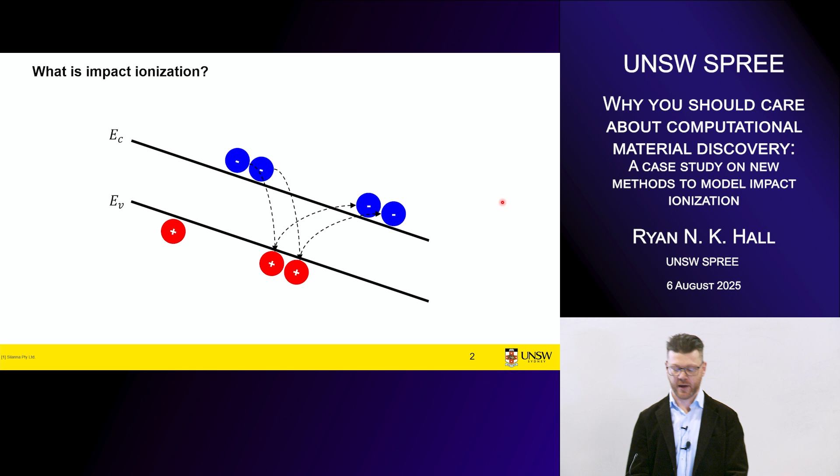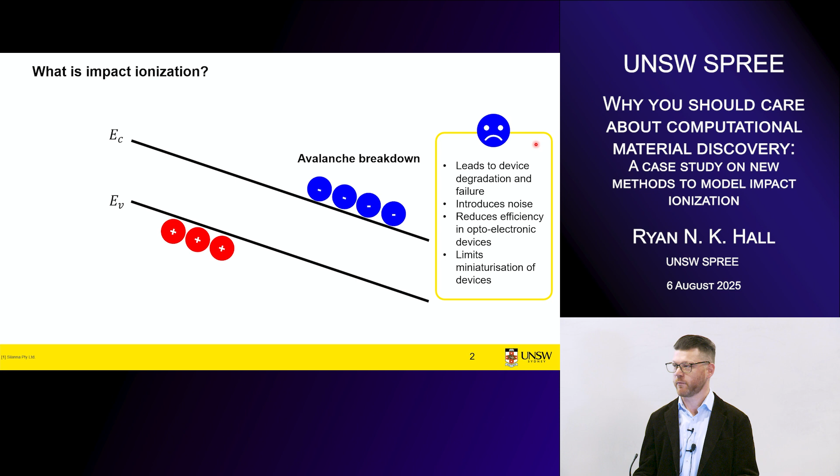If this electric field persists, these subsequently generated carriers can be further accelerated by the electric field, generating more electron hole pairs. When this process runs away in this manner, it's known as avalanche breakdown. We normally think of avalanche breakdown as detrimental to a lot of devices - it leads to degradation and failure, limits the maximum voltage or electric field we can operate power electronic devices at, reduces the efficiency in optoelectronics, and limits our ability to miniaturize modern CMOS devices.

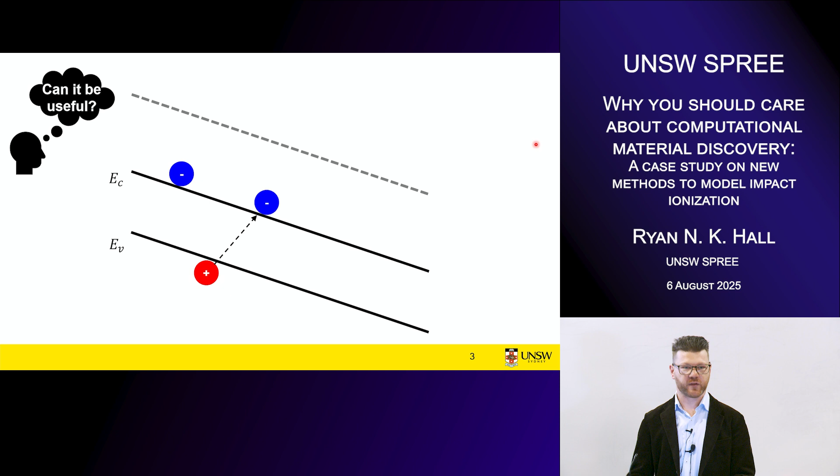But impact ionization can also be quite useful. Here we have the same fictitious band structure again, only this time, let's say a photon with just the right energy comes in and ionizes our conduction band electron to a higher energy state. Now it can impact ionize this bound carrier across the band gap, generating that same electron hole pair, and in the presence of an electric field, this process can lead to an avalanche breakdown that generates a large current in response to, say, a single photon.

This exact mechanism is exploited in devices like avalanche photodiodes, or APDs. It can also be used for microwave or RF generation in devices like IMPATT diodes, and it's commonly seen as a mechanism in high voltage protection devices like Zener diodes and electrostatic discharge protection diodes. But the motivation for my PhD didn't come from these existing applications.

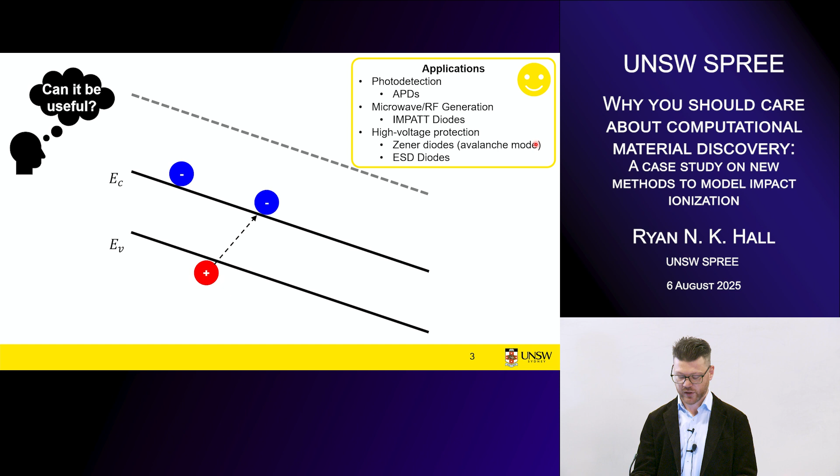Now, all of these devices use very similar architecture. Functionally, they're a PIN diode or a PN heterojunction with an N-type contact for injecting electrons and a P-type contact for injecting holes. In the middle, our recombination layer is typically constructed of a heterojunction forming a multiple quantum well in the case of LEDs.

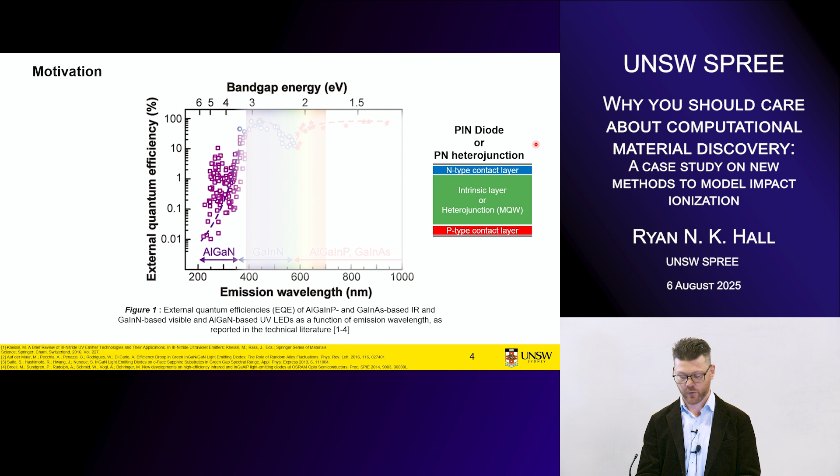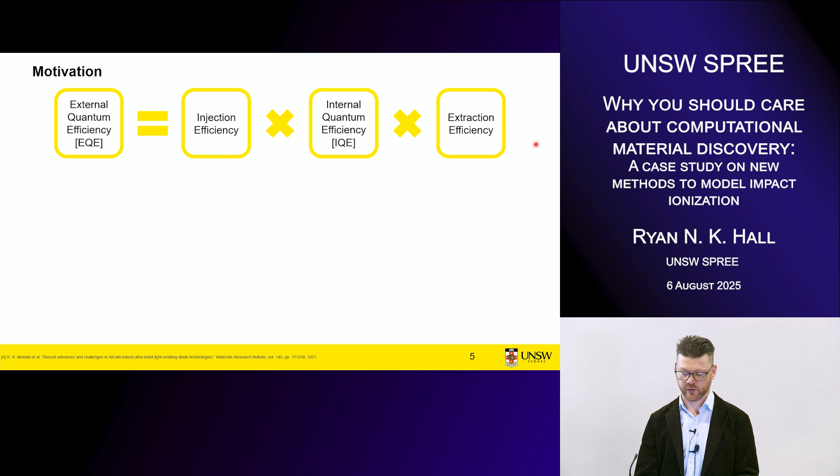So why do these UV devices perform so poorly? Well, the external quantum efficiency can be thought of as a product of our injection efficiency, our internal quantum efficiency, and our extraction efficiency. Now, the reason UV LEDs perform so badly is because we're extremely constrained in the available material systems that we can use. This comes down to that preconceived notion of the device architecture we use, namely this p-n heterojunction, and the material system that's conventionally adopted is aluminium gallium nitride, or AlGaN.

And it has quite high threading dislocation density, which limits its IQE. It also has split modes of polarization, which limit the maximum extraction efficiency. And so this is the reason we see this large drop-off as we move towards 200 nanometers.

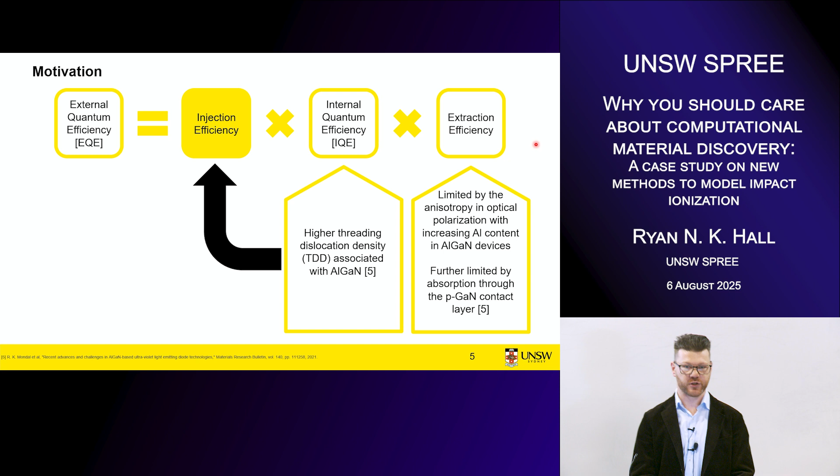But Solana had this idea of, well, why do we use a p-n heterojunction as our LED structure? What if we looked at the way we inject carriers? Could we unlock new material systems and avoid issues with the IQE and the extraction efficiency by looking at different carrier injection mechanisms? Their idea was to use impact ionization. The challenge here was, can we achieve efficient carrier injection in wide and ultra-wide bandgap semiconductors? Their proposed solution was to generate these charge carriers using an impact ionization generation scheme.

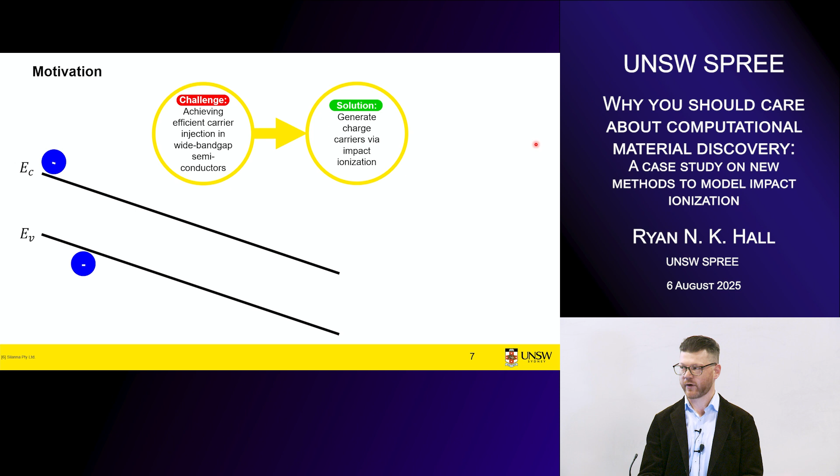Going back to our fictitious band structure again, the way this is applied, we have a conduction band electron accelerated by an applied electric field. It generates an electron hole pair via impact ionization. Perhaps some number of collisions occur in an avalanche scheme. But if we can find some way to relax this applied electric field, we can allow for radiative recombination and hence light emission. The way Solana achieved this is through a spatial device.

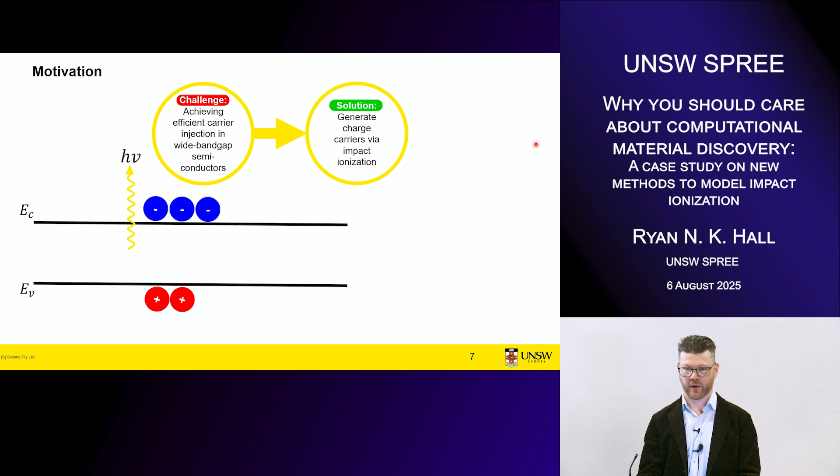We have a sort of simplified structure shown here with two N-type contacts. And this is important - we've mitigated the need for a P-type contact in this material. In this case, the top three layers, the impact ionization layer and this charge/chirp layer, form or functionally act like a P-type contact. The way this works is we inject an electron into the bottom N-type contact here.

It travels through our recombination layer into the charge layer where it's accelerated to sufficient energies to generate an impact ionization event in the impact ionization layer. The subsequent electrons flow out of the device, but the generated hole flows in the opposite direction where it can recombine with another electron inside this recombination layer, leading to light emission without the need for a P-type contact.

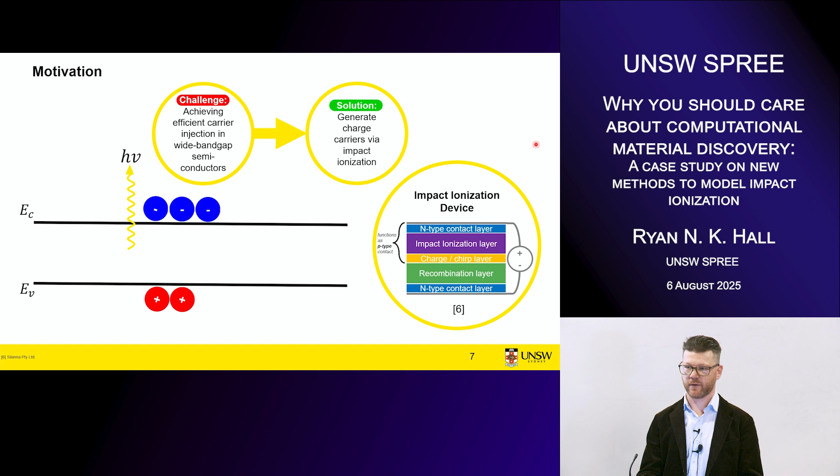And this is important, as I said, because the need for a P-type contact in wide and ultra-wide bandgap semiconductors has severely limited our material selection. So the question Solana posed to me is, can we generate new materials, or can we investigate new materials and their feasibility to achieve efficient carrier injection using this impact ionization scheme? And so the goal of my research is, in general, can we identify materials with favorable impact ionization properties for devices? My approach was to develop a high-throughput framework for computing the impact ionization properties of materials.

High throughput is a keyword here, and it's important because it prohibits experimental characterization as a valid approach. It also prohibits computational methods that are intractable to large-scale analyses.

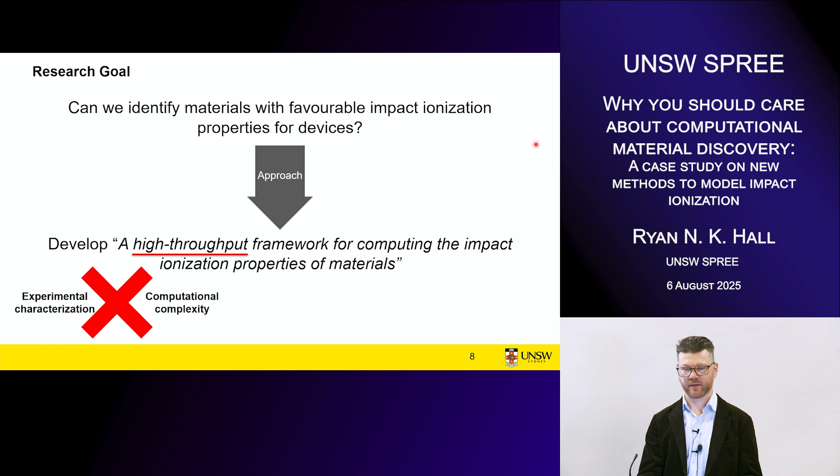And so I started with this problem and started to look at how we model impact ionization and what the limitations are on it. Impact ionization can be modeled in a multi-scale modeling scheme all the way from the microscopic scale right up to the macroscopic scale. At the microscopic end, we have electronic structure calculations like density functional theory, from which we can derive important microscopic properties like the impact ionization scattering rate. This scattering rate tells us the number of carriers generated per unit time as a function of the initiating carrier's quantum state, and it has an associated impact ionization threshold.

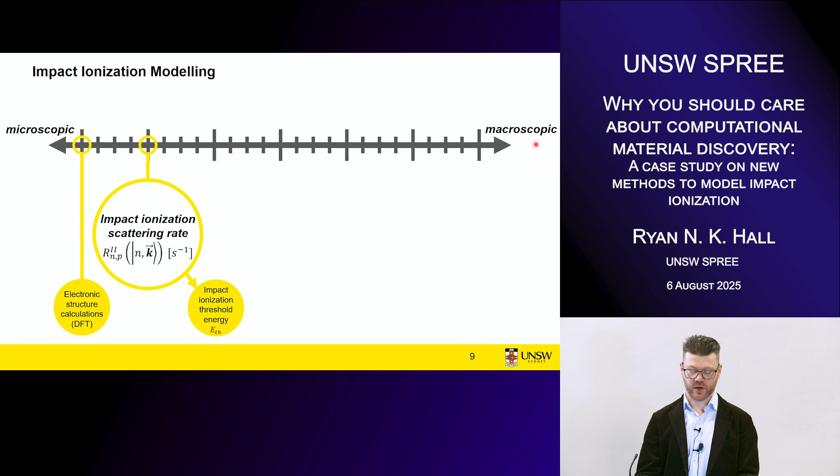On the macroscopic end, we have properties we care a lot more about for engineering semiconductor devices, namely the impact ionization coefficients. These describe the number of carriers generated per unit distance traveled by a carrier as a function of an applied electric field. And from this, we can access experimentally observable parameters like the multiplication factor, or in the case of power electronic devices, the avalanche voltage breakdown fields, etc.

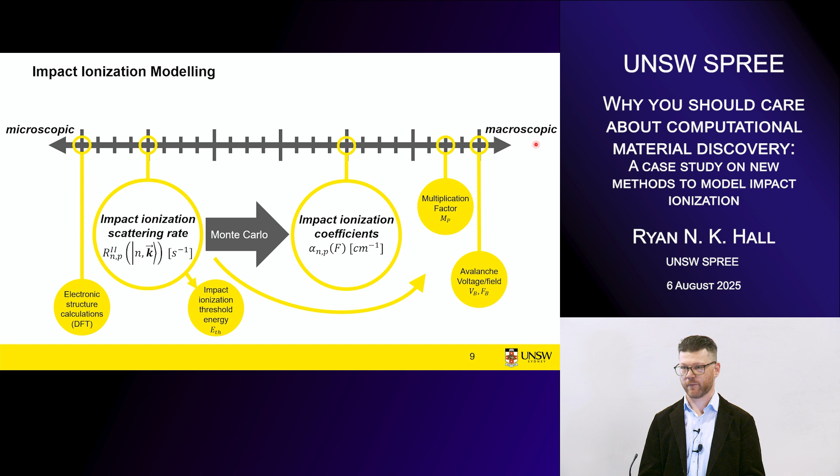So how do we bridge this gap from the microscopic to the macroscopic? Conventional computational methods leverage stochastic methods like Monte Carlo techniques to infer information about the impact ionization coefficients from these more fundamental properties, but these are computationally intractable. My research goal was, can we learn something about these experimentally accessible properties just from these microscopic properties alone and build an efficient computational scheme for identifying new material candidates?

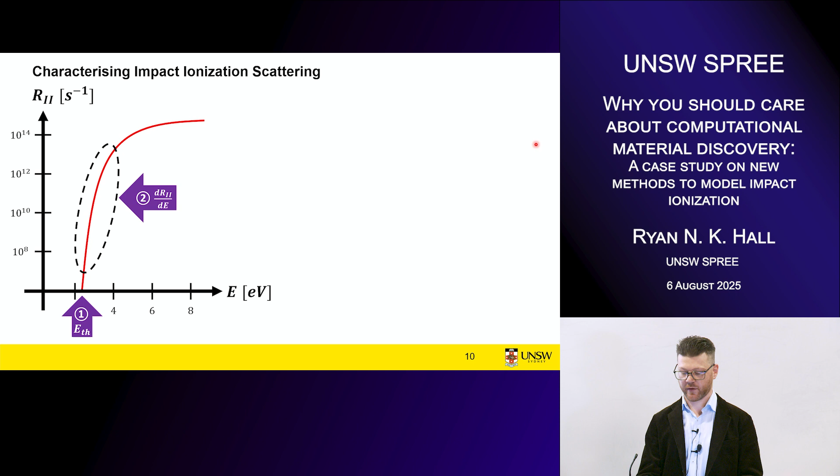The most rigorous way to model this comes from first-order perturbation theory, where we use Fermi's golden rule to describe the transition rate from a set of initial states to a set of final states. This formula looks intimidating, but effectively it says that the transition from an initial state in K1, impact ionizing a state in state 2, to these two post-collision states can be described as a product of a matrix element, which describes their interaction probability, multiplied by their density of final states, captured by this Dirac delta expression.

This process is subject to two conservation criteria. Here we can clearly see the energy conservation criteria described, and if we write K2 in terms of K1, K3, and K4, we have the momentum conservation constraint as well.

Practically, we want some energy averaged transition rate. We don't want to see what an individual scattering probability looks like for some random set of carriers. So we have to integrate this complex function over all possible combinations of post-collision states, leading to a gnarly six-dimensional integral with a composition of a Dirac delta. We're getting into computationally intractable territory, and this is without even exploring the matrix elements, which are themselves a very challenging problem to solve.

And the integral doesn't stop there. If we want the energy averaged rate, now we have to integrate over all of the constant energy isosurfaces and figure out, for a given energy, what's the average rate of impact ionization.

I didn't want to do this, not only because it was hard—although that was very convenient—but it's computationally prohibitive for these high throughput applications. So, luckily for me, the more useful output of these studies is this Keldysh model formalism for the impact ionization scattering rate. Effectively, it says that this energy averaged scattering rate can be described by a simple function where we have an exponent term alpha, a threshold energy ETH, and some average matrix element described by P.

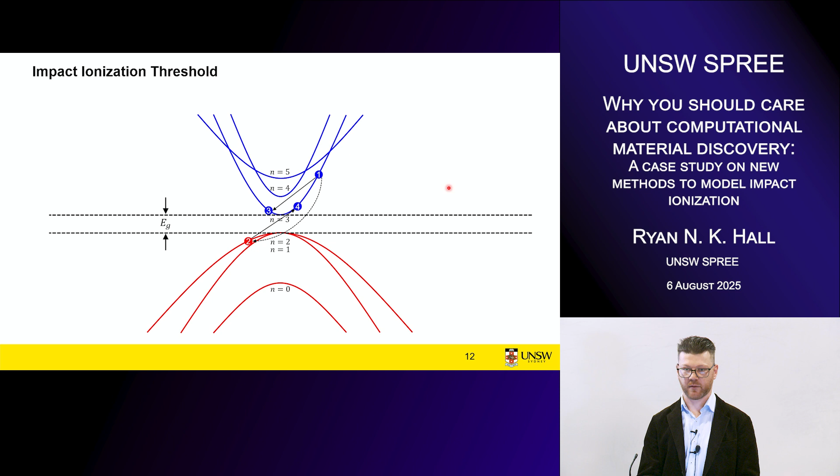As I mentioned before in Fermi's golden rule, there are two conservation criteria this scattering mechanism must satisfy: total energy must be conserved, and total momentum must be conserved. Taking these two conservation criteria, we can solve for the minimum energy this initiating carrier can have, if we know information about the electronic band structure, and then define the impact ionization threshold.

It turns out it's rather convenient to solve this minimization problem in two steps. First, we say let this initiating carrier come from any state—it's not bound to the band structure—and we just minimize the total energy of the post-collision states and the impacted carrier. That gives us a curve describing the minimum energy as a function of an initiating carrier's momentum. Then, from the intersection of that curve with the band structure, we can find the true impact ionization threshold. This next figure hopefully makes that clearer.

But before we get to that, conventionally, this impact ionization threshold in experimentally accessible simulation environments is approximated by this rule called the 3-to-2 band gap rule. The main output of my first chapter was to show that this is a really poor approximation. It comes from an assumption that the effective masses are equal in the conduction and valence band, and inherently that the initiating carrier comes from one of those bands.

And if we make those assumptions, it turns out that we can say the threshold is just 1.5 times the band gap of the material.

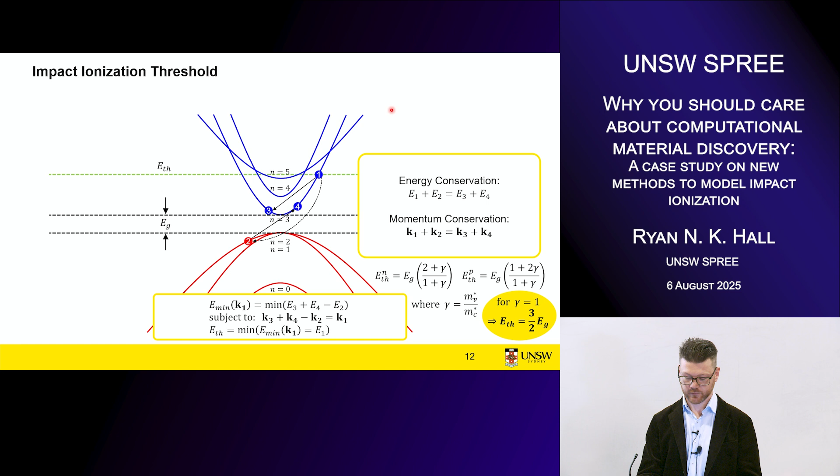So back to the figure that hopefully makes this minimization strategy a little bit clearer. Here we show the band structure for gallium nitride with a band gap of 3.4 electron volts. Superimposed on it is the blue curve showing the minimum energy an electron would need to have as a function of its momentum in order to satisfy the energy and momentum conservation constraints, and red is the same for holes. Where this curve intersects the band structure, we have an impact ionization threshold.

In fact, the threshold is the lowest energy intersection with this band structure. All of these higher order interception points are important, but we'll get back to those a little bit later on.

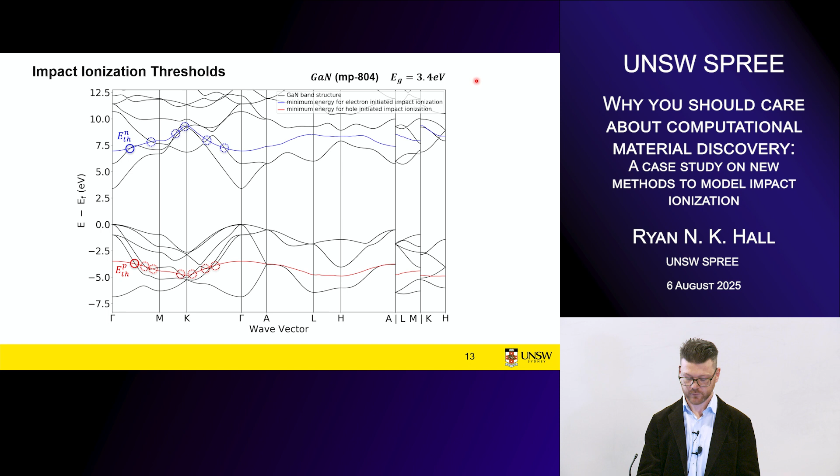So I took this minimization algorithm and I wanted to leverage this database called the Materials Project in order to perform these high throughput analyses.

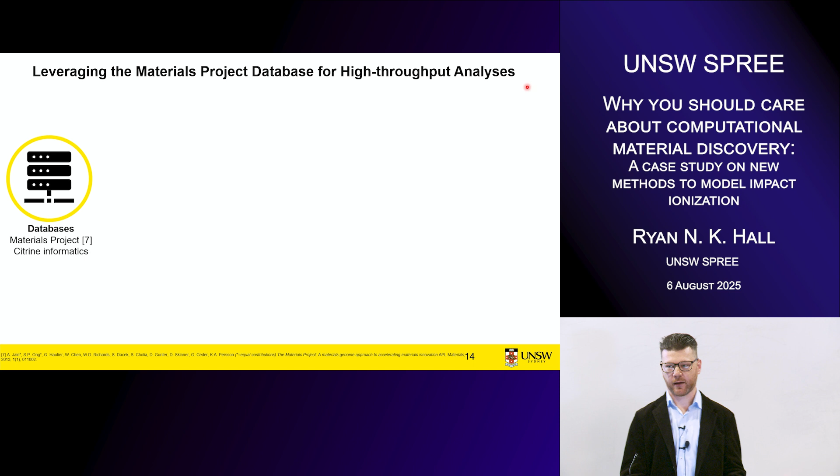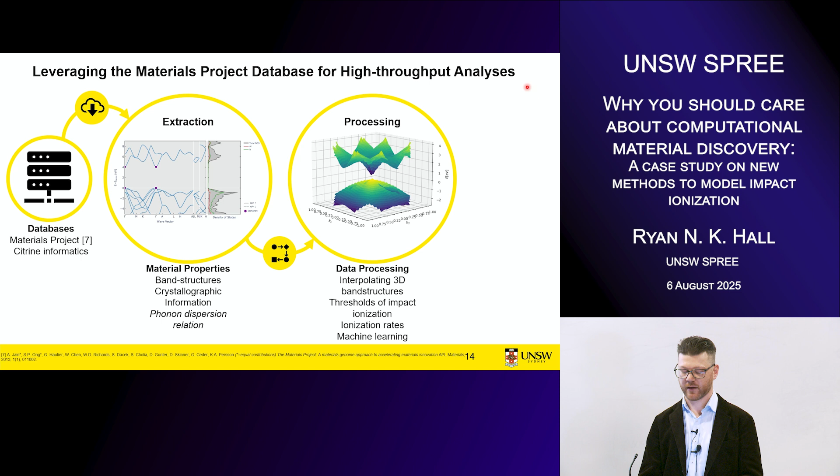The Materials Project database contains several 100,000 density functional theory calculated electronic band structures. We use that information and extract from it the band structures, crystallographic information, and things like the phonon dispersion relation. We then perform our minimization algorithm to extract the thresholds of impact ionization, including a few pre-processing steps.

And finally, we have our outputs, which we can recontribute to the academic literature or directly to the database through their API. And so what did those results look like?

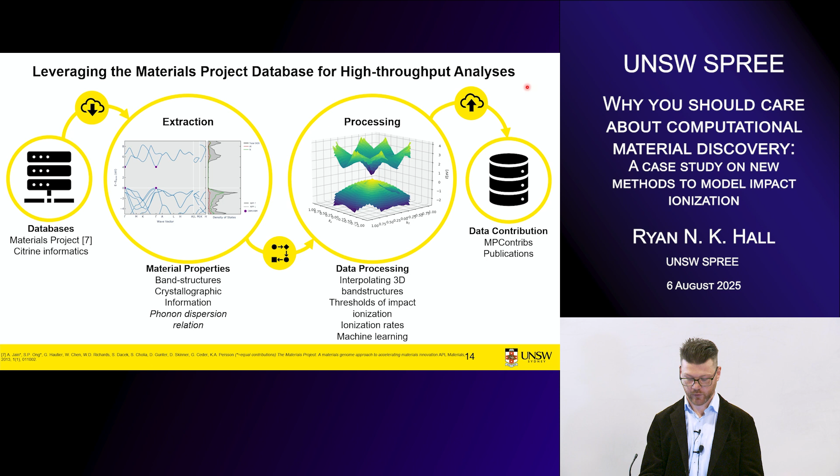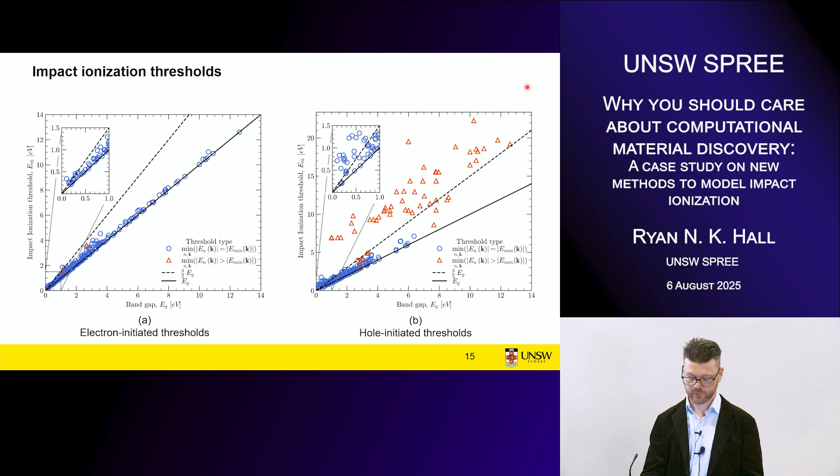So why is this the case? Well, like I said before, the 3-to-2 band gap rule assumes that impact ionization, firstly, the carriers have to come from these first conduction and first valence bands, and that those bands have to have equal effective masses.

And so for that to be true, the energy conservation criteria alone tells us that therefore the intraband energy range of that first band must be at least the band gap. The idea being here that in order for a carrier to undergo impact ionization, it has to be able to lose at least a band gap's worth of energy and remain in the conduction band.

Therefore, if it's to come from the first conduction band, that conduction band has to have an energy range that is at least a band gap's worth.

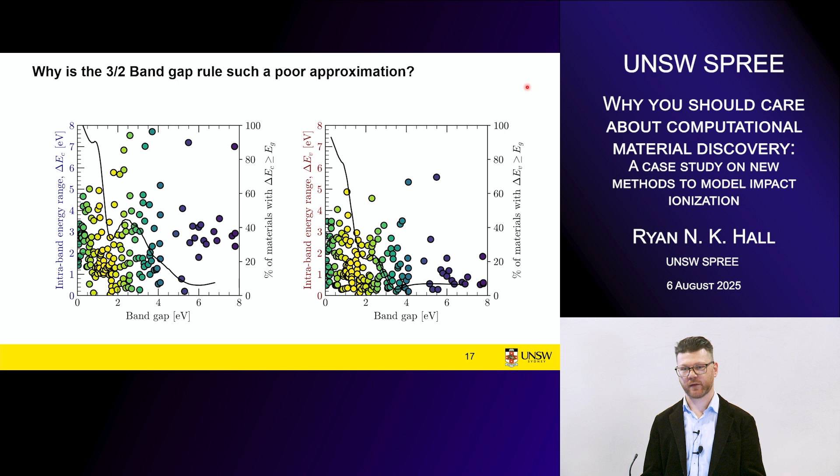And we can see once we go above sort of 1.5 to 2 electron volts, in both cases, fewer than 50% of the materials satisfy that criteria. And so this kind of gives us an indication of when the 3-to-2 band gap rule might be applicable. And beyond this point, it can't be valid at all.

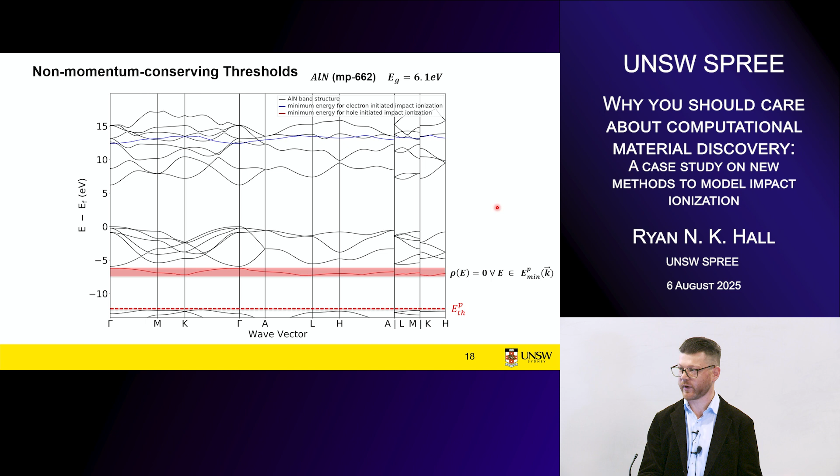So what's the impact ionization threshold in this case? We assume then that it must come from the next available energy state. And so this threshold, in the case of aluminium nitride, gets pushed up to quite a high value. This actually has really important implications for materials.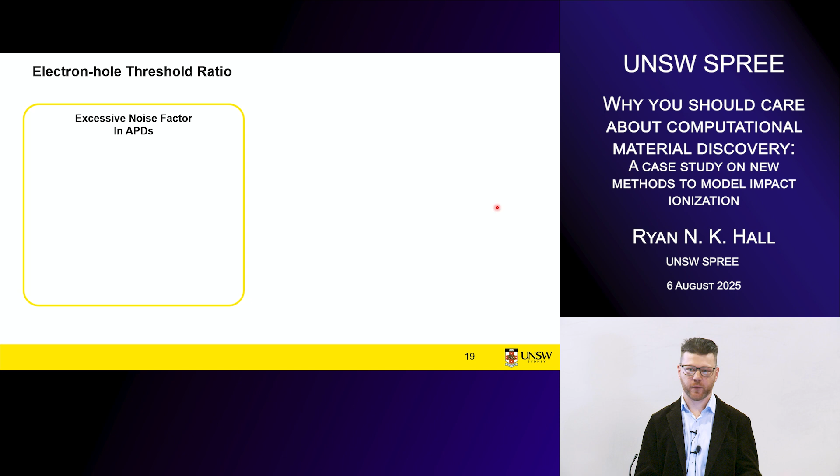We can look at something like the electron-hole threshold ratio. Why might this be important? Well, we talked about APDs at the start. One of the really important properties for APDs is that you have high asymmetry between the electron and hole initiating impact ionization coefficients. And this is because the excess noise factor depends quite heavily on this ratio K.

It turns out that the impact ionization coefficients are quite strongly related to their thresholds, and so we can say that K approximately has an inverse exponential dependence on the difference between the hole and electron-initiated threshold. So if we can find materials with a really large difference between their electron and hole-initiated thresholds, they might be really good material candidates for avalanche photodiodes.

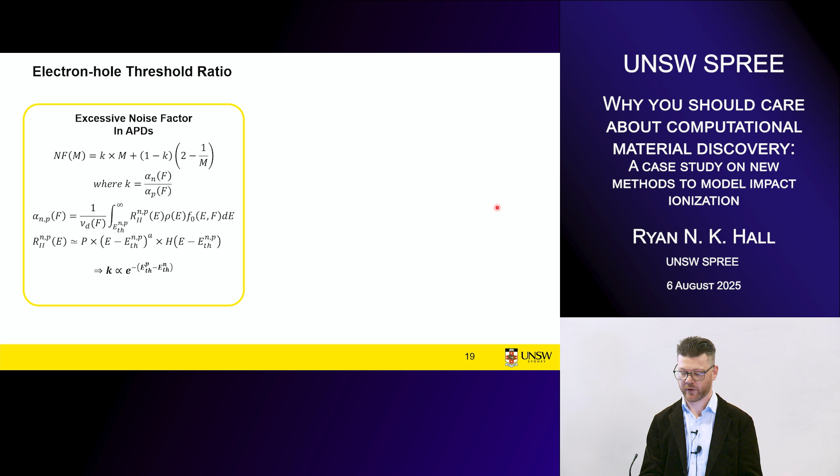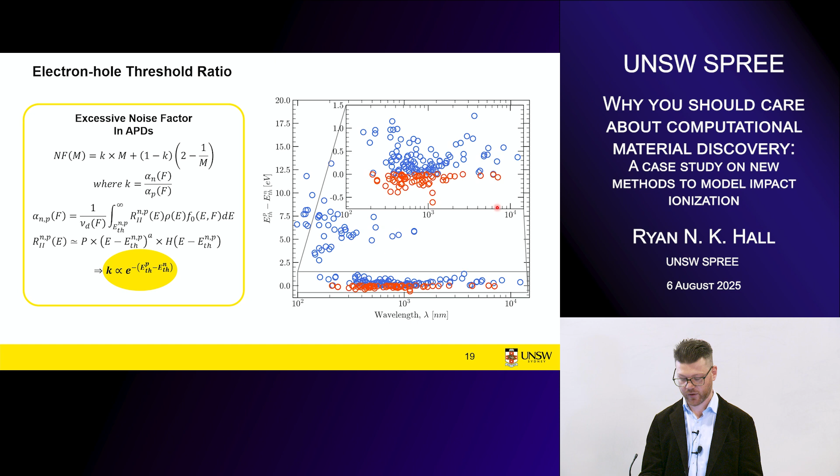We can see, particularly at these really short wavelengths, in the deep ultraviolet regime, there's quite a few materials with a lot of asymmetry. For those interested in specific materials, I've also got some tabulated data that shows some of these potential candidates for APDs. If you want a detailed look, go to the recording or read my thesis.

So in this first chapter, we solved the question of what the impact ionization threshold looks like. And we can use that to already perform some really meaningful material discovery. We can identify candidates for APDs, and we can delineate the importance of the threshold in terms of debunking the 3-to-2 band gap rule.

So in the second chapter, I wanted to explore how quickly this impact ionization scattering rate increases as a function of the electron's or hole's energy.

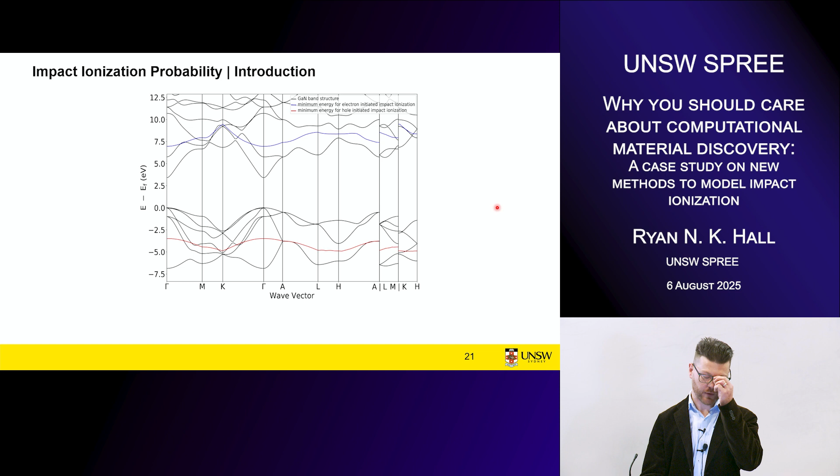To do this, we can actually leverage some of the information we generated in the first chapter. One of the things you'll notice about this minimum energy curve is it shows a lot of K-space anisotropy — it changes as a function of the applied momentum. In the 80s, another author, Sano, had this idea that this anisotropy in the minimum energy required for impact ionization is largely responsible for the onset of impact ionization about the threshold.

The idea being that this K-space anisotropy really comes from the momentum conservation constraint. At threshold, we know momentum is perfectly conserved, but we're very sensitive to changes in momentum close to the threshold, where the phase space for our scattering rate is very, very small.

And so he said, well, if we have an electron above a threshold, it definitely will impact ionize. This is an approximation. And if we have one below the threshold, then it won't. We can write that as a Heaviside step function.

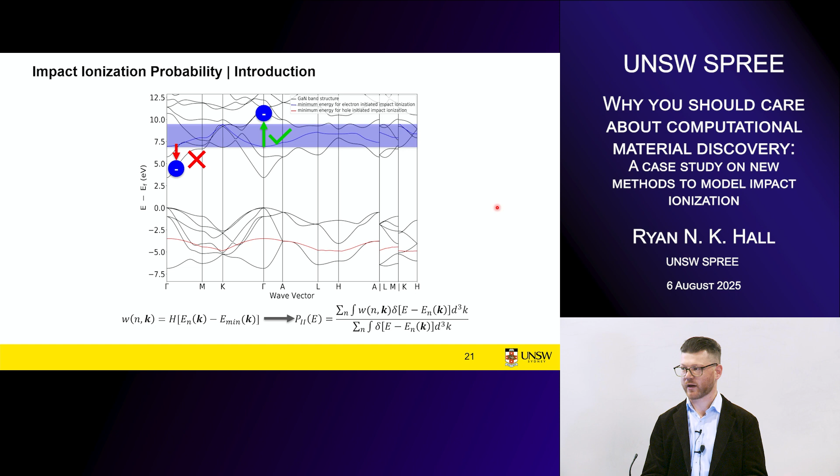We could say, well, if our energy in our band is greater than our minimum energy required for impact ionization, the probability of impact ionization is 1. Otherwise, it's 0. And with that, we can then integrate it over these closed energy isosurfaces to get the energy averaged probability of impact ionization.

In order to solve this on a high throughput scale, I had a lot of fun developing some new methods for the simulation. This integral, while it's only in 3 dimensions, still involves that rather challenging composition of a function with a Dirac delta. So I leveraged methods used in computer vision to solve this integral in a computationally tractable manner.

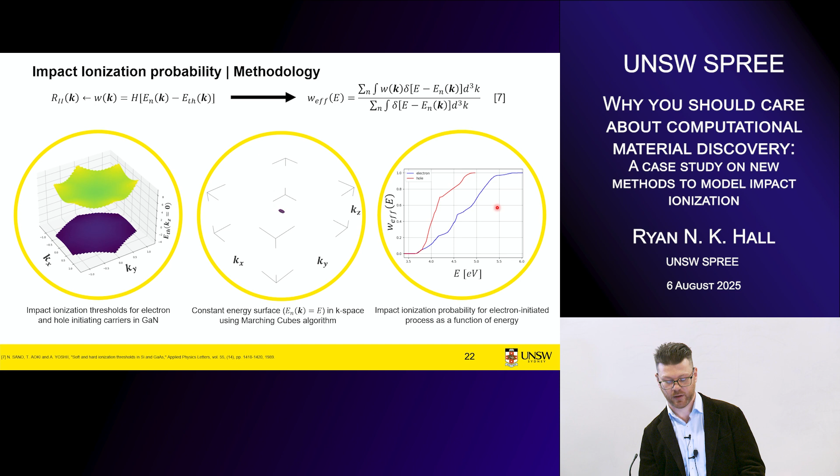Namely, I used an algorithm called the marching cubes algorithm to extract these constant energy isosurfaces and their normals and compute this integral. The workflow was to interpolate our thresholds in K-space, extract these constant energy isosurfaces, and then compute the corresponding probability integral, which we can see on the right, for gallium nitride.

Here are some results compared against the author's original work and other work replicated later on. At the time this work was done, its value wasn't fully appreciated. I think Sano's idea was that it would be a stand-in for the scattering rate itself, but that was very quickly debunked in subsequent literature.

Some other authors looked into it as an interesting metric, but there was no really useful result to derive from that. The work initially performed here was just to validate that our integration method works well, and we can see, at least for silicon and gallium arsenide, similar probability curves to those proposed by the original author and subsequent authors, with a bit of a big difference in the case of silicon, but this was addressed also by Harrison et al.

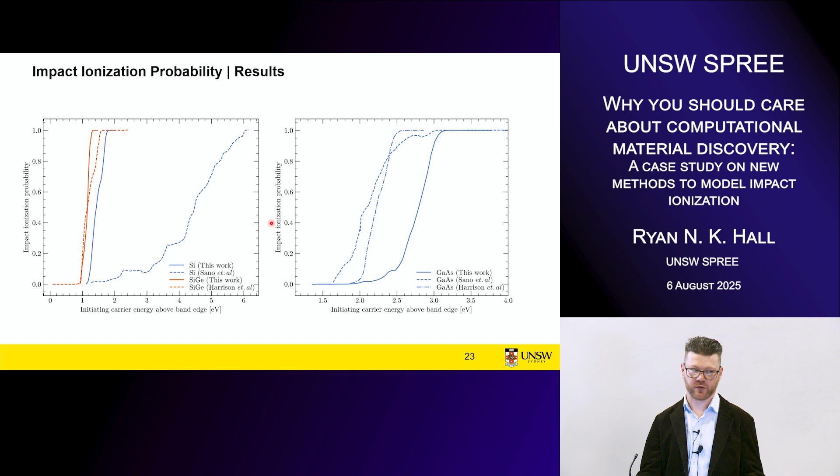In their subsequent follow-up. But the real value in the impact ionization probability isn't from this curve alone. This doesn't really tell us much. It gives us an indication of the onset of impact ionization close to the threshold. But again, we can't use it in Monte Carlo simulations to derive these important experimentally observable properties.

Looking at gallium nitride and aluminium nitride, though, we can learn something, at least from these curves alone. I think one of the most interesting results I got from these wide bandgap semiconductors is that sometimes this probability curve is not monotonic. This was a frustration for me during the PhD, as I was consistently predicting the threshold energy for aluminium nitride to be virtually equal to its bandgap. But everyone else doing these comprehensive calculations using Fermi's golden rule was finding the threshold energy to actually be up around 6.6 electron volts.

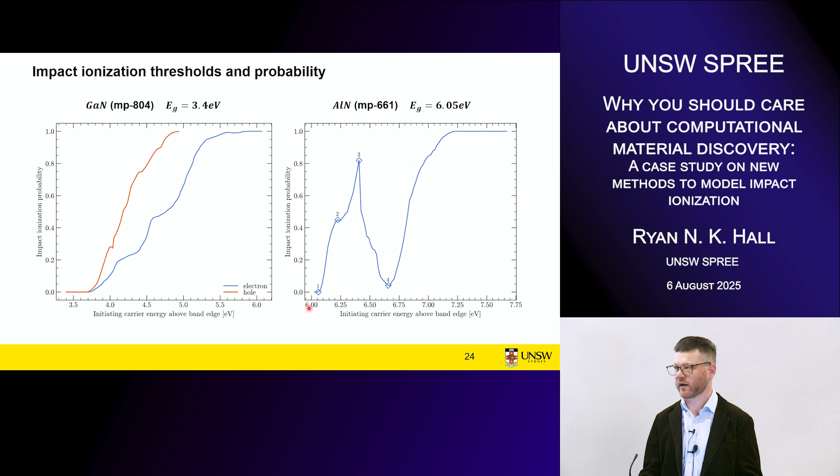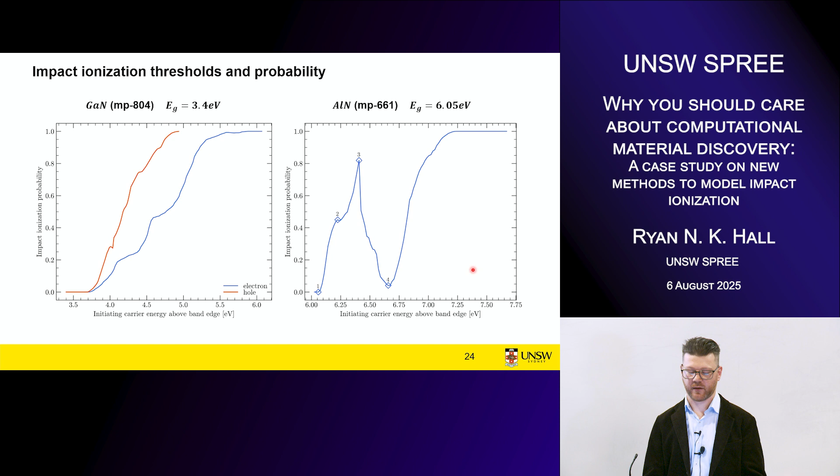This is because while we can find a threshold here, i.e. a point where energy and momentum are perfectly conserved, the corresponding phase space could still be very small. We don't know, because in this probability assumption, we say if we're above the threshold, impact ionization definitely occurs. But we're not guaranteed to satisfy those two constraints. From this curve, we can at least extract interesting inflection points where the true experimentally accessible threshold might actually lie. So I took this a little further and thought there's got to be something else we can do with these probability curves.

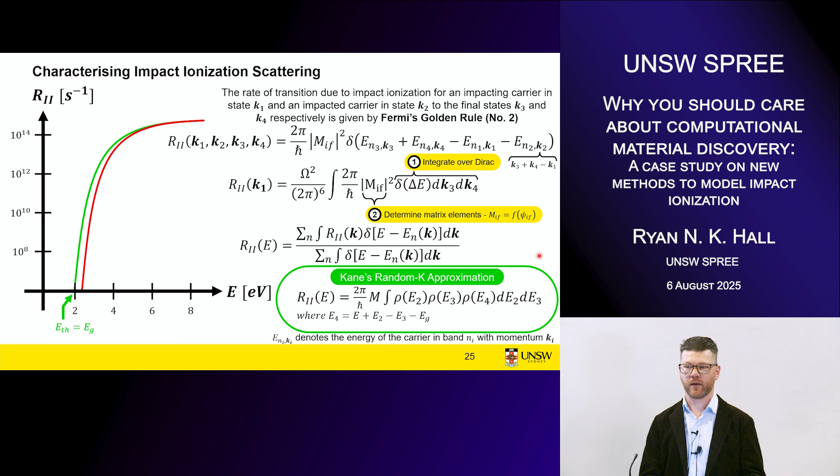Going back to Fermi's golden rule, there's an approximation introduced late in the 60s where we drop the requirement that momentum needs to be conserved. This is known as Kane's random k approximation. It turns out quite nicely that you can represent the energy averaged scattering rate as simply an integral of the single particle density of states. The problem with this approximation is that your threshold energy always ends up being the bandgap, because you're not constrained by the criteria to conserve momentum. But our probability curves do take into account the effect of this anisotropy close to threshold.

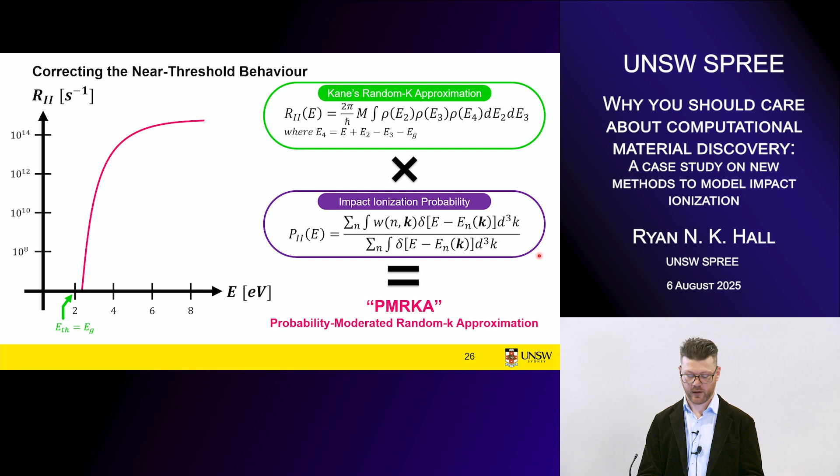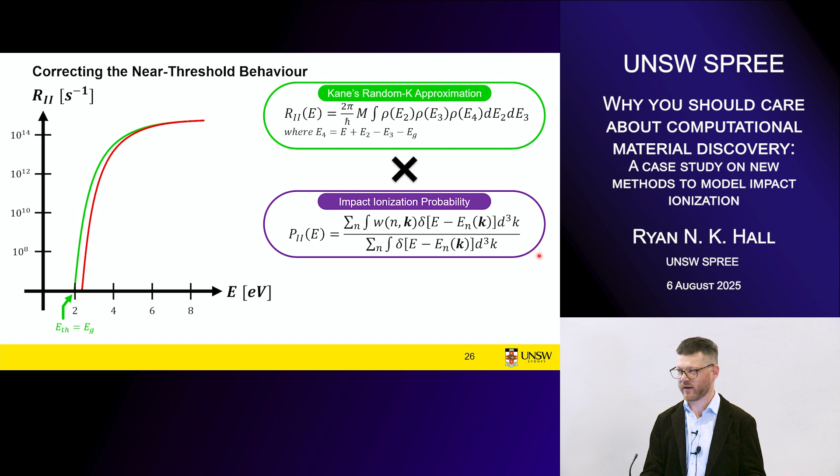So what if we took Kane's random k approximation and just multiplied it by a probability curve? I define this term the probability moderated random k approximation, and it corrects the near-threshold behavior of Kane's random k approximation. This is quite good because looking at Kane's rate, we know at high energies it converges to the true scattering rate of the material, and it's the near-threshold behavior that's really important for how devices actually operate.

Just to prove this is useful, I looked at this for silicon, gallium nitride, and aluminium nitride in detail, where there was data I could compare against in the literature. The dotted lines show the random k approximation, and the solid lines show the results with the probability moderated random k approximation. The markers show data from the literature derived using full Fermi's golden rule calculations. You can see remarkable agreement between the PMRKA and these full band methods with very little computational overhead. This is true for silicon, gallium nitride, and also aluminium nitride.

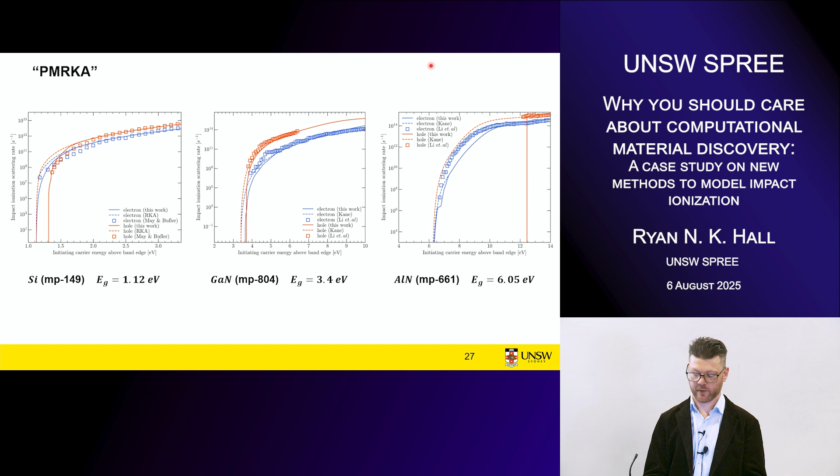So the output of the second chapter of my thesis, to discover how this onset of impact ionization occurs close to the threshold, I felt like I achieved that, and certainly my examiners agree.

The last part of my chapter was looking at this sort of averaged matrix element. This gives us the y-scale of our probability curve, at least on the log scale. It shifts it up and down. This is really important because if we want to do some downstream Monte Carlo analysis, the absolute value of our scattering rate is absolutely critical.

So far, we've used something called the constant matrix element approximation. We just assume that the matrix element is some constant value over all energies.

If we wanted to comprehensively model the matrix elements, we have to calculate these very cumbersome overlap integrals between the pre- and post-collision states. In between that overlap integral is this Coulomb potential that describes how strongly coupled these states are. If you look at the Coulomb potential, the denominator there is a dielectric function of momentum and omega, it's getting computationally intractable very, very quickly.

So the constant matrix element approximation says, let's not do that. Let's just say it's a constant value and we'll tune it to experimentally accessible data. This has proved to be actually quite good for indirect bandgap semiconductors, but unfortunately it's quite a poor approximation for direct bandgap semiconductors, especially wide and ultra-wide bandgap materials.

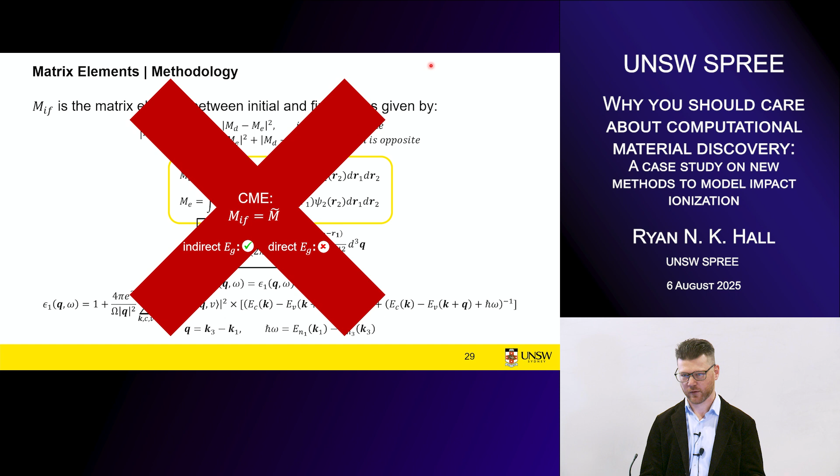So I thought maybe there's a way we can introduce some of the momentum dependence of these matrix elements without going through this comprehensive overlap integral calculation. We look at the Coulomb potential here. We can see in the denominator we have this Q squared term, and this is the momentum exchanged between the initial and final states.

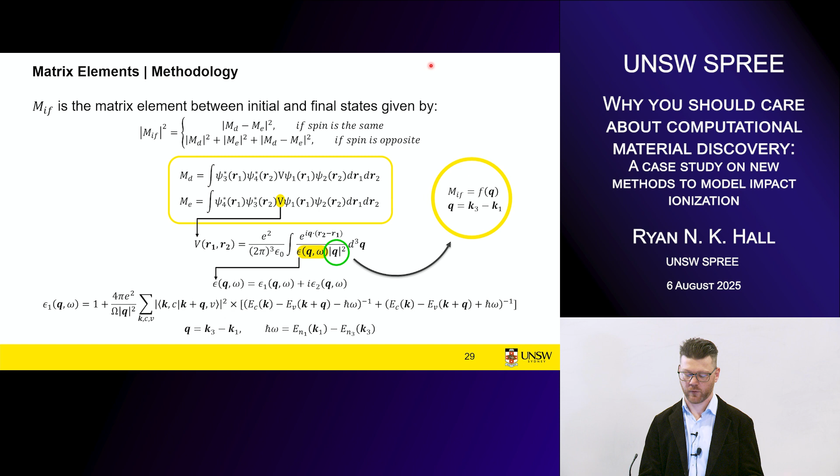So I thought maybe the matrix elements are strongly coupled to some functional dependence on the average momentum exchanged between the carriers. And when I looked into this, I was quite surprised about how good this exactly was.

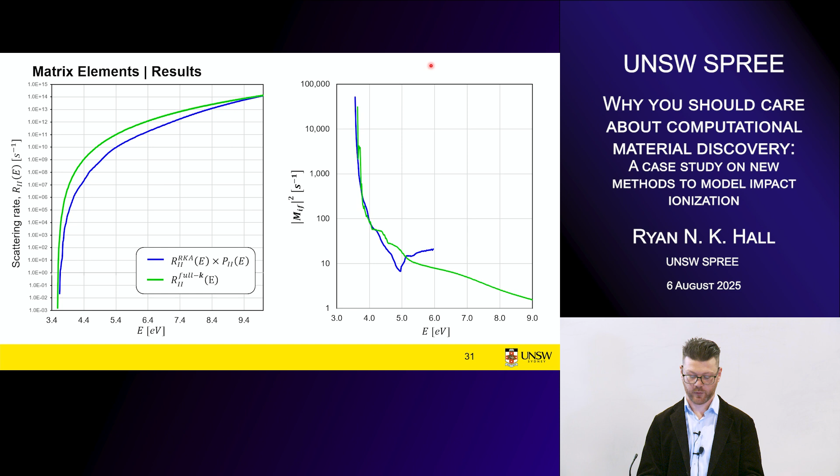Well, the way I looked into this is I said, let's take the constant matrix element approximation that we used earlier, shown in blue, and let's compare it against the true scattering rate, or at least the truest estimation we have of the scattering rate using these full band Monte Carlo methods from Fermi's golden rule. Let's then assume that the difference between these two rates is purely attributed to the constant matrix element approximation, and therefore extract the energy dependence of the matrix elements from the difference.

And we'll compare that extracted value against the average momentum exchanged, which is our blue curve here. I think you'll agree that certainly close to the threshold, there's a remarkable agreement between these two curves. So the matrix elements are strongly dependent on the inverse square of the momentum exchanged, and that actually captures the functional behavior of the momentum dependence very, very well.

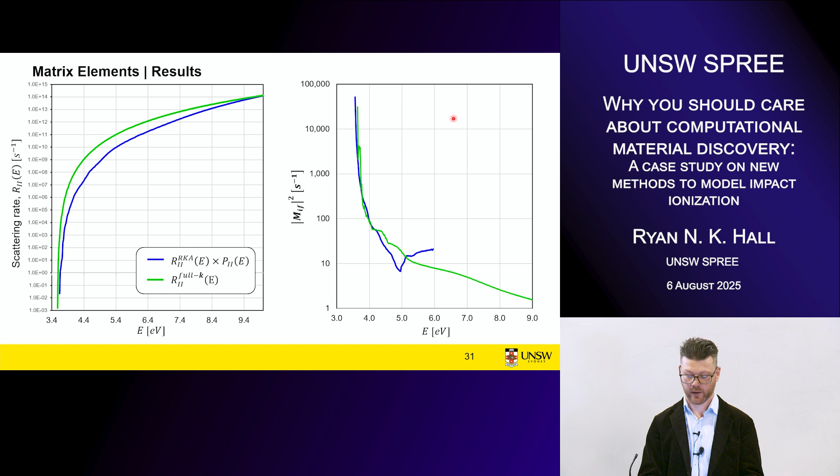So I took this approach and applied it, again in a high throughput framework, and looked at lots of different materials. I'm just going to show 4 materials here. You'll notice I show the same materials because unfortunately the literature is quite sparse in terms of comparable results. But certainly for aluminium nitride, gallium arsenide, silicon, and gallium nitride, the average momentum exchanged kind of fits the trends that we would expect and gives us a good approximation for these matrix elements.

What these plots show is the y-axis being the average momentum exchanged versus the initiating carrier's energy. And again, to make this computationally tractable, we can actually leverage all of the work we did way back in chapter 1. When we solved this minimization problem to find the threshold energy, we also have in our domain all of the states of the carriers that were involved in calculating that threshold.

We also have an energy range over which this emin curve deviates. For every point in that curve, we know the momentum of the pre and post collision carriers. So we can use this as an estimator of the average momentum exchanged close to the threshold, which is where these matrix elements matter the most.

You'll notice that in the high energy limits, most of these momentum curves kind of saturate to these sort of random values. Except for gallium nitride. It's a bit of a strange material. There's lots of interesting results there.

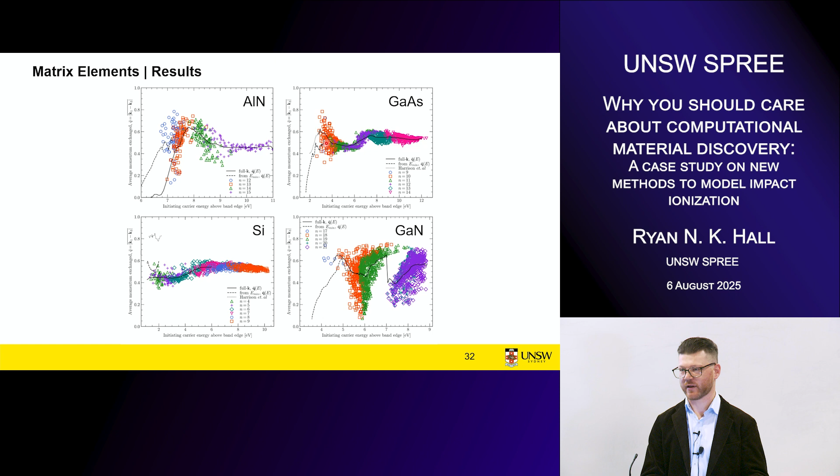Again, read my thesis. And so you can see in the dotted line here, I've got the average momentum exchanged as extracted from these minimization results compared to using full Monte Carlo based integration methods. I found that close to threshold, it really captured the dynamics that we cared about and was able to accurately correct that near threshold matrix element behavior.

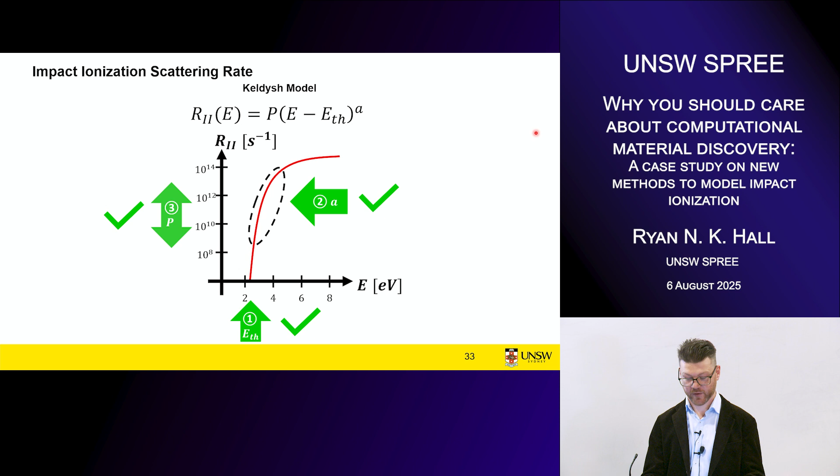And so again, I felt satisfied, as did my examiners, that chapter 3 provided a computationally tractable method for extracting the momentum dependence of these matrix elements. And that brings me to the concluding remarks for this seminar.

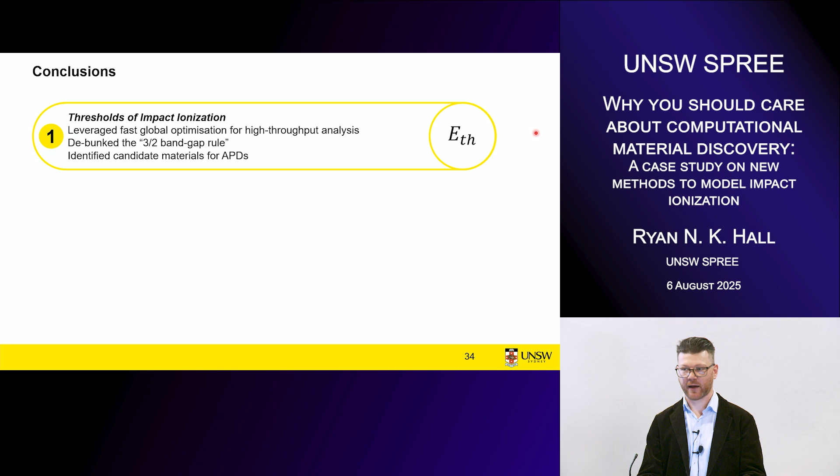In chapter 1, in the first section, we investigated the thresholds of impact ionization, leveraging these fast global optimization methods to perform high throughput analyses. And we debunked the long-standing 3/2 band gap rule and identified candidate materials for avalanche photodetectors.

In the second chapter of my work, I looked at these impact ionization probabilities and coined this new method, the probability moderated random K approximation, to correct that near threshold behavior of the onset of the scattering rate. The thing I was most excited about was this new integration strategy using the marching cubes algorithm to solve these integrals, which involve the composition of a function with a Dirac delta.

And there's a lot of applications for solving Fermi's golden rule and also for doing density of states calculations in general. In the final chapter of my work, I looked at the matrix elements and improved the constant matrix element approximation by capturing its momentum dependence, and showed how we can use the results from the minimization problem, which is the most computationally efficient method presented here, to capture that near threshold behavior and provide a meaningful approximation to the total impact ionization scattering rate.

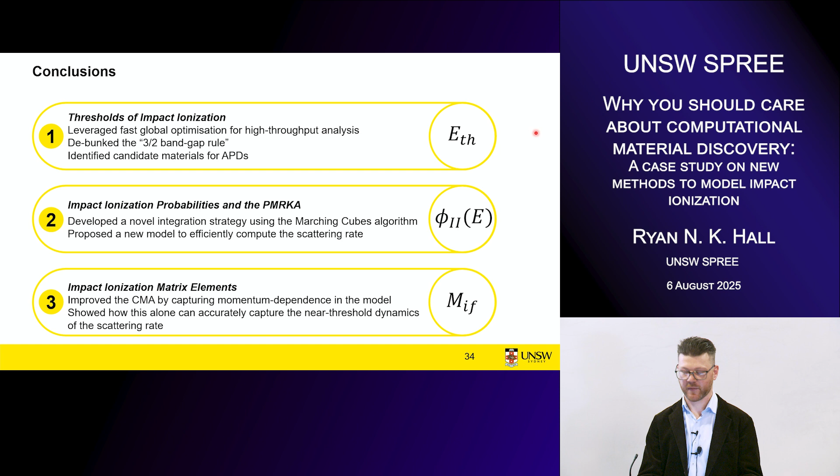Thanks everyone for your attention. I'd like to welcome any questions now.

Thanks, Ryan, for the nice talk. Do you have questions for Ryan?

Thank you, Ryan. That's a really clear presentation on something that I think can be made quite complicated. On slide 32, you had a nice comparison between the different... yes, sorry, this one, yes.

So I suppose my eye's drawn to what's going on in gallium nitride. Yeah, it's an interesting material. Because your silicon is fairly stable, gallium arsenide similarly, and yet gallium nitride has this discontinuity, and I'm sure that relates to something in the band structure. Absolutely. Could you tell us a bit more about what's actually going on?

Yeah, so there is actually something special about these kind of saturating values, and it was something I picked up from this theory in mathematics called cube point picking or cube line picking. We often make the assumption that the random K approximation in the high energy limit is a good approximation because our initiating carriers and our post-collision carriers are uniformly distributed in K space. And that's true if the density of states continues to increase into this high energy limit.

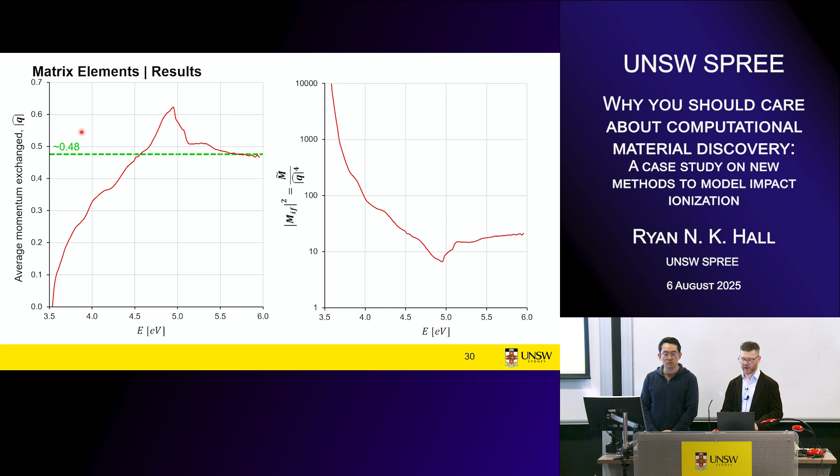If we use a unit cube as our basis set, then we can get an estimator for how true this uniform distribution really is. There's two kind of special numbers that pop out. On one of the previous slides, I showed this value, 0.48. This is what happens if you have your initiating carriers perfectly uniformly distributed in a cube, and they are ionizing a carrier that lies at the gamma point, i.e. at momentum 0. So that's the average Euclidean distance between a random point in the cube and the origin. It's called a Robbins constant, number 0, I think.

And then you'll see this other value that they tend to saturate towards ends up very close to 0.6 - I think it's 0.58 or something from memory. This is another form of this constant if you have your initiating carriers randomly distributed and your post-collision carriers also randomly distributed. This happens as you move to really high energies. Now your initiating carrier and your post-collision carriers both lie in regions where the total density of states is really high. In gallium nitride, if we look at the band structure, that's not true.

If you look at the density of states, it initially increases in the conventional form that we expect. Then there's a range of energies in the conduction band where the density of states is very, very low. We kind of pass that region twice - you'll see that we almost get to the first Robbins constant and then the second one, and then it drops away again. That's because the initiating carriers cannot ionize any carriers where the density of states is low, so they have to ionize much lower energy states, and they need correspondingly higher energies, so the average momentum exchange goes back to being almost a direct transition again.

So yeah, it's an interesting result, and it actually makes solving Fermi's golden rule for gallium nitride using these sort of full-band methods very computationally challenging, because a lot of the assumptions and approximations that you might make for the Dirac delta turn out to converge really poorly. A lot of the data I was able to extract from literature actually had quite poor outcomes for gallium nitride, particularly for electron-initiated processes. It's just a really challenging material. I think there's lots of interesting implications for this in the way it's used in devices, particularly the sort of directional dependence of the electric field, for example.

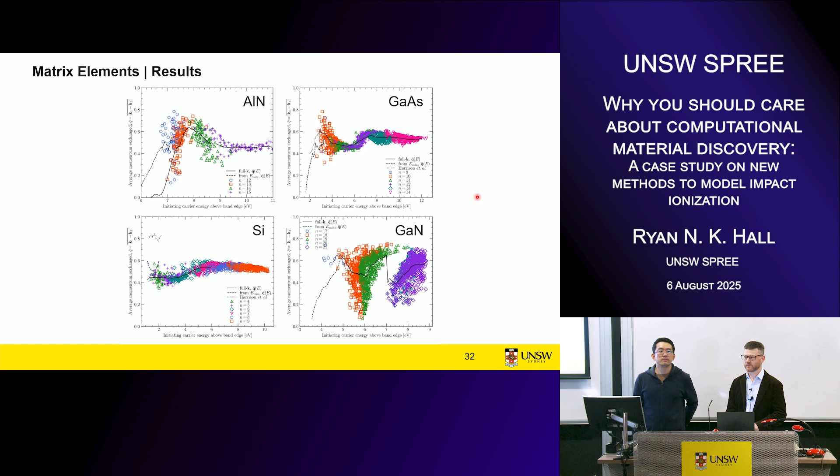This very clear talk reflects the good work that you've done throughout your PhD, and I commend you on the work that you've done. Personally, I'd like to say that Ryan was one of the best PhD students I had the chance to supervise over the 20 years at this university, so congratulations for that.

At the beginning, you mentioned that there was an industry partner. Yeah, absolutely, Silanna, Norbert Krause. Would you like to say a few words about how your work fitted into their vision of what they wanted to accomplish during the PhD?

Yeah, absolutely. I guess the initial project was quite different to what we ended up executing, but throughout the PhD we maintained a really positive working relationship with our industry partner. We utilized the flexibility in the PhD to do some of the more exploratory work. The initial goals were to better understand how impact ionization works in wide and ultra-wide bandgap semiconductors. When Norbert was conducting his literature review, he found very poor models and very poor approximations for understanding this behavior, even in AlGaN and GaN, which are the material systems conventionally used for these sorts of devices. So I spent time visiting them and working with them on these models.